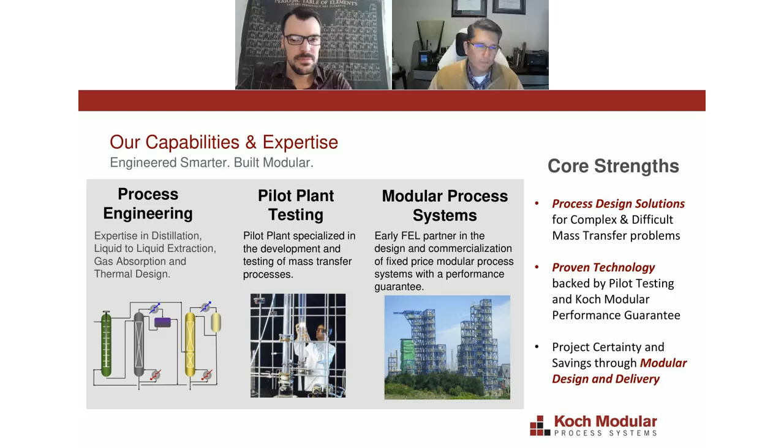I'll go briefly into our capabilities and expertise because Chris will be talking a lot about this during his presentation. Process engineering - our company is predominantly managed and run by process engineers who have expertise in distillation, liquid extraction, gas absorption, and thermal design. We also support that with pilot testing, which is very important when you're trying to commercialize systems, so we have a pilot plant located here in Houston. And then all our projects are delivered modularly, so we don't stick build anything - everything goes out as a truckable module. That sums up our core strength: process design, pilot testing, which is backed by a process guarantee, and then you get project certainty and cost savings through modular delivery.

That's enough about us. Just to introduce Chris - Chris has been with us for a few years now. Chris graduated from the University of Michigan, holds a chemical engineering degree. For about 15 years he's been working for various companies, including Dow Chemical, Origin, and BP. He brings a lot of experience in taking projects from concept to commercialization, so he's a very good person to be talking to us today about that specific topic. So with that, I'll hand it over to Chris.

Thank you, Mauricio. So today's talk on process development and scale-up challenges will roughly break into two parts. An early part on solvent selection and modifying a chemical reaction or separation to ease the process scale-up design, and then the latter half will talk about equipment selection and metallurgy.

So just so that we're all on the same footing with one another, what do we mean by process development? You may be familiar with the technology readiness level, or the TRL scale - this is used by NASA - or perhaps the Commercial Readiness Index, CRI. In general, I would say technology or process development is occurring once a chemical process has reached TRL 4 and it is trying to go to 5, 6, 7, 8. This means that a chemist or a team of chemists has successfully demonstrated the reaction at bench scale using beakers, 100 milliliter round bottom flasks, that sort of scale, and now it's time to move it into 100 liter or 1,000 liter reactors with the goal of eventually scaling to commercial scale.

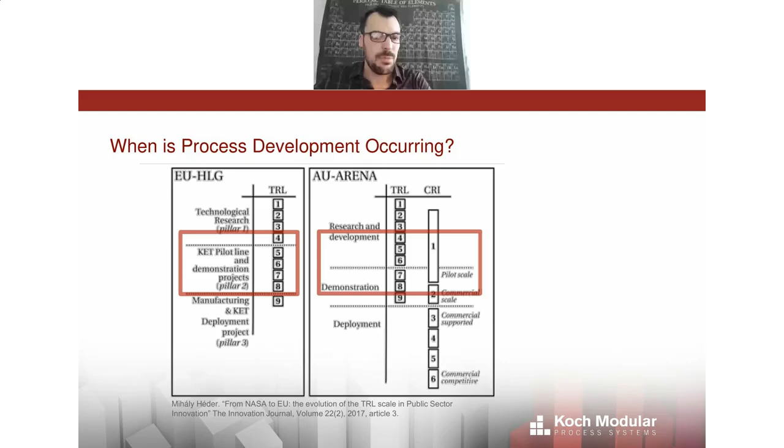When things are smaller or earlier than TRL 4, this is still the technology catalyst development ideation stage - different concepts are still being tried. And when you're later than TRL 8, you already have a manufacturing plant, and at that point you're replicating, doing minor improvements in efficiency or yields to become more competitive. So doing process development from TRL 4 to 8 is an exciting time because you have a lot of leverage - a lot of small decisions can have large impacts on how much the process will cost either to build or to run. We're going to go through a few examples of that.

Process development qualitatively could be thought of as conceptualizing a process, putting together the very first version of a flow diagram, doing the very first version of a simulation to show where the heat and energy and the difficulty of the separations emerges, usually in that first process simulation.

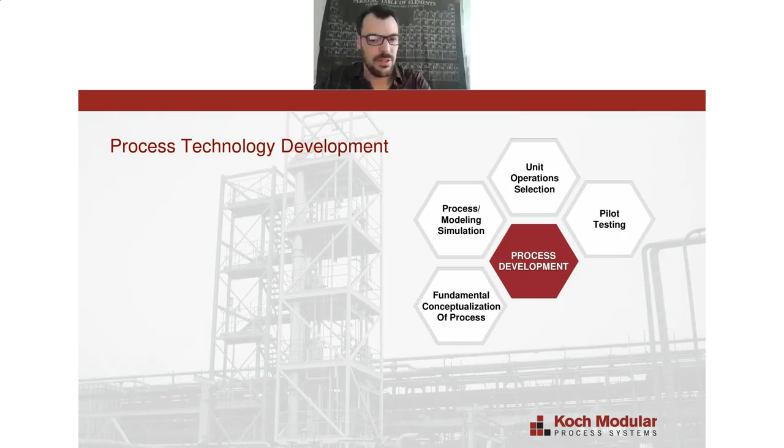Process development also includes the very first time you're going to select your particular unit operations. We'll go through a couple of examples later in the talk of how do you even choose the right filter or the right heat exchanger for a particular process you need. And often piloting is going on for the first time during process development, which has all the same challenges of a commercial plant design. You have to select all the equipment and get it to work and put it together.

So let's take an example. This is an expired patent I pulled off the internet. It's an oxidation reaction of cyclohexane to adipic acid.

Suppose you were the chemical engineer who was presented with this chemical reaction and you were interfacing with the team of chemists who had just finished developing this to the 100 milliliter wet bench scale. What might be one of the first things you do or ask for? There's likely to be a separations downstream to recover and purify the adipic acid, and knowing what you're separating from is important. So it would be nice if the chemist team provided you with a list of not only the desired products, but the concentrations of the impurities that are in the reactor effluent stream.

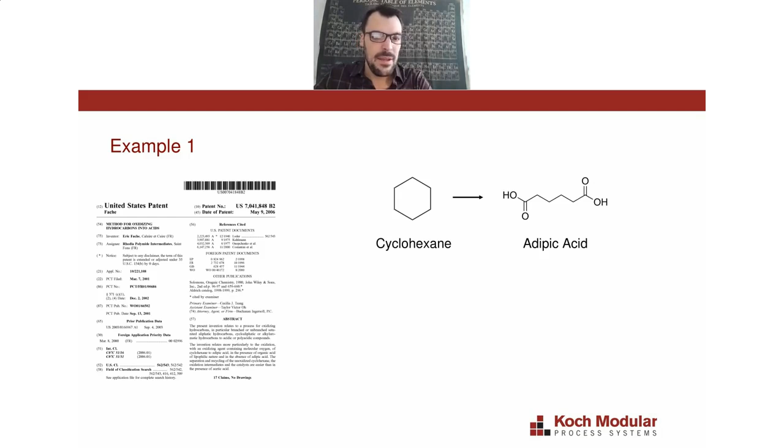That table is nice, but I recommend asking to see the chromatogram. Oftentimes it will be an LC liquid chromatography or GC gas chromatography chromatogram that analyzes the reactor effluent, and it will show the peak of interest. You don't have to know a whole lot about chromatography, but you can get a great deal of understanding of what's in there by pointing out certain peaks.

What is this? What is this? Things that elute late, out near 14 and 18 minutes - the x-axis here is minutes - those are higher boiling or heavier compounds. Things that elute early are lighter boiling compounds. And you want to just reconcile what the chemist is telling you with what you see in the gas chromatogram or liquid chromatogram.

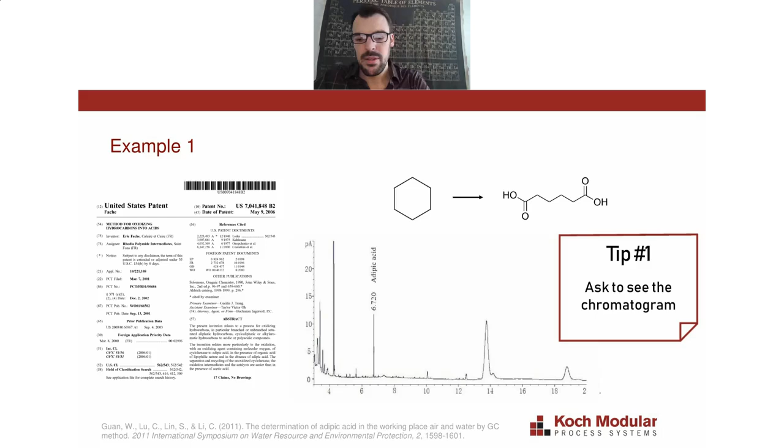The next thing I would recommend is always ask the question, what about heavies and inorganics? If a compound is too large, too high molecular weight, or too high a boiling point, it won't be resolved on the gas chromatogram - it'll just get stuck in the trap on the column. And it's unfortunately been my experience that those compounds aren't necessarily appreciated until much later in the process, perhaps when piloting has occurred and someone's wondering why there's a thick sludgy material at the end of the distillation.

This might have been discoverable earlier on if someone had asked, does this chromatogram resolve all the heavies that you're making? And inorganics, similarly, like salts, do not resolve on a gas chromatogram. So you want to ask about those as well, because they will be part of your separations challenge, even if they don't show up on the analytical analysis.

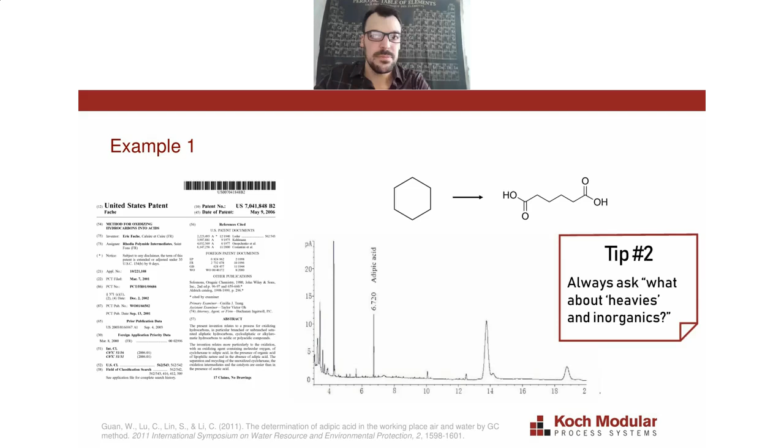The next thing I would do would be to scrutinize solvent choices. Since this is an oxidation, my expectation is it is analogous to para-xylene oxidation to make polyester. That reaction, terephthalic acid being a monomer for polyester, is well known - there are hundreds of operating facilities today that conduct this reaction, and it is done in acetic acid solvent. So it would be my expectation that this patent, which is doing a similar oxidation, probably uses acetic acid.

And indeed, when I read the abstract in the final sentence, you can see this was done in the presence of acetic acid. Now, alone, that might not pose a problem, but in the third to last sentence that I've highlighted, you can see the patent suggests they will be separating and recycling unoxidized cyclohexane. So if we want to recycle cyclohexane in the presence of acetic acid, is that going to be problematic?

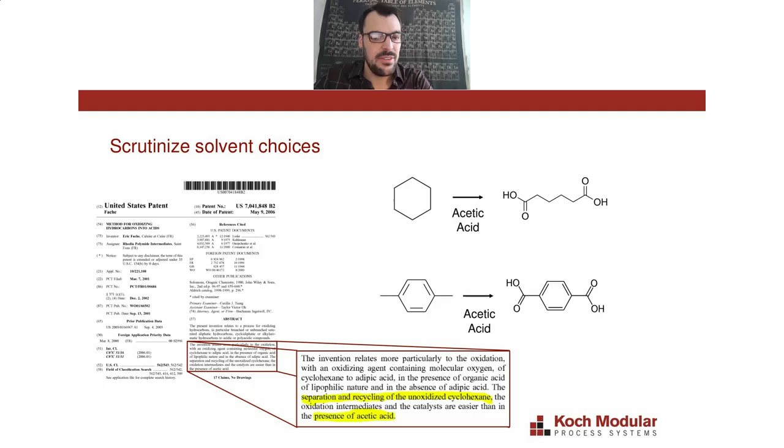So process engineering might ask the question, is there a substitute solvent for acetic acid that would work just as well from a chemistry standpoint, but doesn't pose this difficulty during the recycle? We could still design a process to separate this azeotrope.

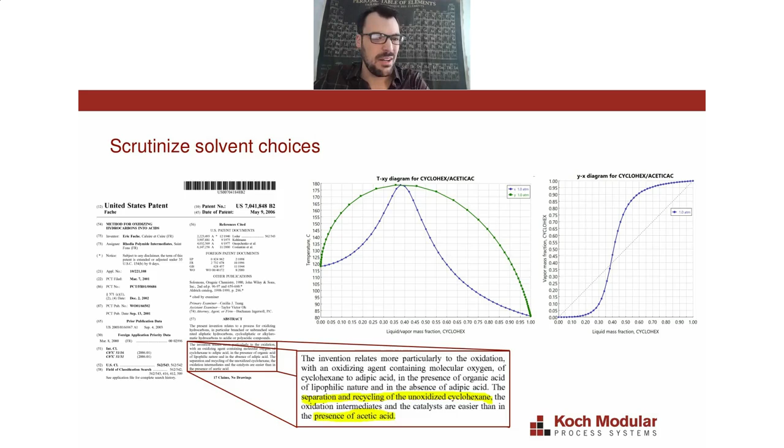It might involve bringing a third compound in and doing some sort of extractive distillation or using an entrainer or something like that. But what if we could make our life simple and just avoid that altogether? A reasonable suggestion might be to increase the carbon count of the acid species by one.

Instead of using acetic acid, let's look at propionic acid. The lower left panel is the TXY diagram for cyclohexane-propionic acid, and we can see it lacks the high maximum boiling azeotrope now. We have a not quite, but nearly ideal open envelope here.

On the right, the XY diagram shows that these are now separable. The bottom's product will be pure propionic acid, and the distillate has a little bit of a pinch up here. You can imagine stair-stepping the McCabe-Thiele diagram, and as you march towards the upper right-hand corner, the VLE does pinch.

So maybe a 95% cyclohexane, 5% propionic acid distillate can be produced from this particular set of VLE data, and that may be acceptable. But you've achieved nearly a complete separation now between your unreacted raw material and your solvent just by making a very subtle solvent switch.

And if you're still at TRL4, meaning we haven't yet graduated from the lab, we haven't yet done very expensive process engineering design, the pilot hasn't been built, this is a simple thing to go back and check. Once you're further down the chain and the pilot's been built and the engineering is done and the site has been chosen and the capital project is authorized, these kind of switches become virtually impossible and at least very expensive and causing of delays. So the earlier they can be contemplated, the better.

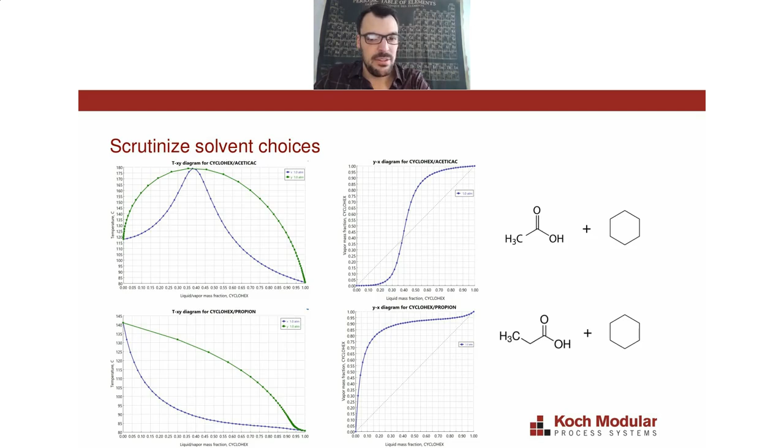All right, let's zoom in on this pinch a little bit here. Supposing they like the idea, but 95/5 recycle is just not going to work. That's okay, chemical engineers have a big bag of tricks. So what can we do to relieve the pinch at the cyclohexane-rich end of the spectrum?

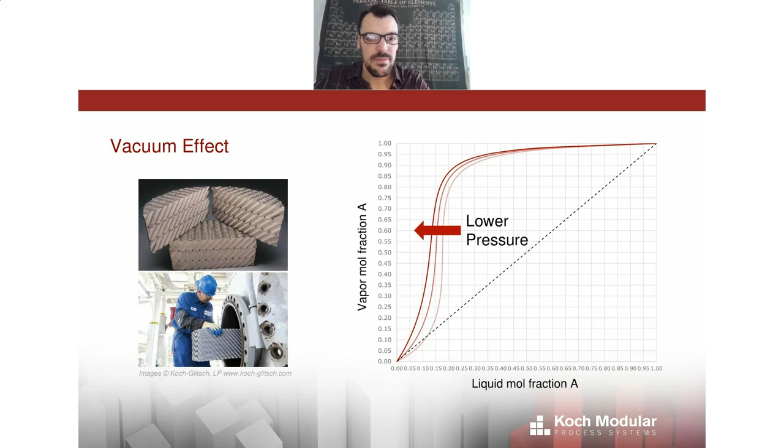So this could be a solution to relieving the pinch. It's a general rule of thumb that reducing the pressure of a separation increases the relative volatility between the two species. You often end up needing fewer theoretical stages and/or less reflux.

This can be most easily demonstrated if you're looking at a Cox chart. The y-axis here is incremented per the log of vapor pressure, so we have log P on the y-axis, and the x-axis is spaced out as 1 over T in absolute temperature terms, although it's displayed in degrees Fahrenheit.

When you have log P versus 1 over T, this is effectively turning the curved line you would see on an Antoine equation plot into a straight line. It linearizes VLE data, and you can see you get nearly straight lines for a given compound. Choosing a point at the high pressure, high temperature end has a smaller gap between any two given compounds than the low pressure, low temperature end.

So provided the VLE lines are not parallel, they do in fact diverge at the low pressure end, you can usually enhance the separation by reducing pressure. There's a bunch of known compounds on this plot, and that makes it easy to design for them, but occasionally a process engineer will be faced with the task of designing for compounds that are unknown.

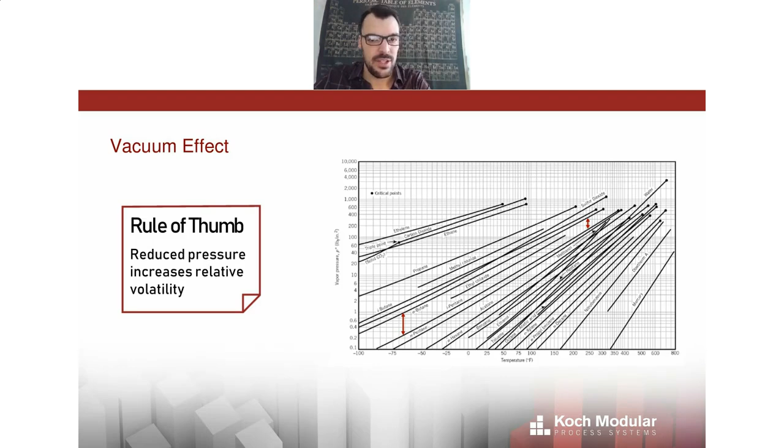And it may be necessary to go into the laboratory and generate your own binary pairs so that NRTL, the non-random two-liquid model, can predict the VLE behavior. This is not an easy task. You must carefully set up and operate an apparatus so that you don't have any theoretical stages.

You want to put the vapor and liquid in perfect equilibrium. Unfortunately, it's a common mistake or common unknown or oversight to have half of a theoretical stage in your VLE apparatus, and that will give you the wrong results. So the founders of Koch Modular published a paper almost 30 years ago. It was 1995.

It's still available in Chemical Engineering Online, which teaches how to very accurately and successfully measure binary pairs through VLE still apparatus operation, and gives the example shown here.

Not everyone has the apparatus or the desire to measure their own binary pairs. So when someone comes to Koch Modular, we offer our services in our pilot lab to measure these binary pairs on the client's behalf.

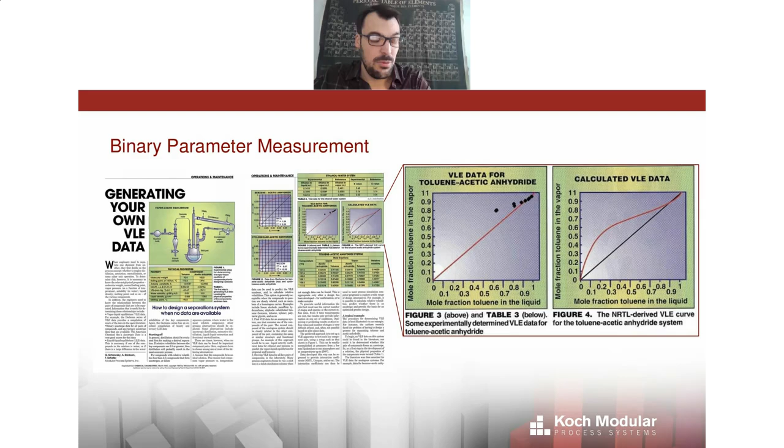We've done them many, many dozens of times successfully. The neat thing about accurate measurement of binary interaction pairs is they essentially enable a scale-up factor of infinity. If you know the behavior of vapor and liquid at this small scale, you can design any size distillation tower you want, without piloting it. That's rather unique to distillation.

The process engineer may suggest substituting a solvent for other reasons besides azeotrope. For example, chemical compounds have widely varying odor threshold ranges. Threshold limit values are the maximum, the TLV, shown in the second column here.

This tells you the maximum ppm to which a worker can be exposed. We also have the IDLH, the immediately dangerous to life and health value. And in table 3 on the right, we have the maximum allowable effluent concentrations to waterways before they become toxic to aquatic life.

So if your process has a wastewater discharge stream, it may be useful early in process design to find out the discharge limits for that compound, and whether you have a process operation that can readily achieve those limits. It may be wise to substitute solvents for something with a 10 or 100 times higher discharge limit, particularly if the separation for removing that compound from the wastewater stream is difficult.

All these tables and more came from Ian Smallwood's Solvent Recovery Handbook. I've referred to this book many times when trying to substitute a solvent or get away from an azeotrope. It's a handy reference.

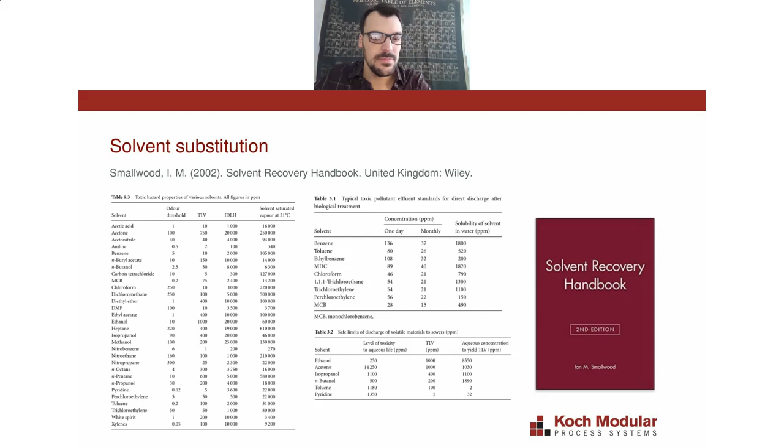Another task we might want to do is get rid of a solvent entirely. It's quite common for a process at TRL4, at the bench scale chemistry, that the chemist has selected a solvent to produce a product, and the product and solvent will be similar compounds but not identical.

For example, they're trying to produce propionic acid, and they did the reaction in acetic acid. Those two can be resolved by analytical techniques, and it's very easy to tell how much propionic acid was made because it doesn't overlap in peak with acetic acid.

But we don't necessarily need that capability at production scale. If you can run the reaction in the product itself, why not do so and save yourself an extra separation?

This is not a good idea if your reaction is equilibrium limited. Reversible reactions, if you flood the reactor with product, will tend to drive it in the wrong direction, so reactants form instead of product. We don't want to suggest this for a reversible reaction, but for irreversible reactions, this can be a very clever trick for eliminating a separation.

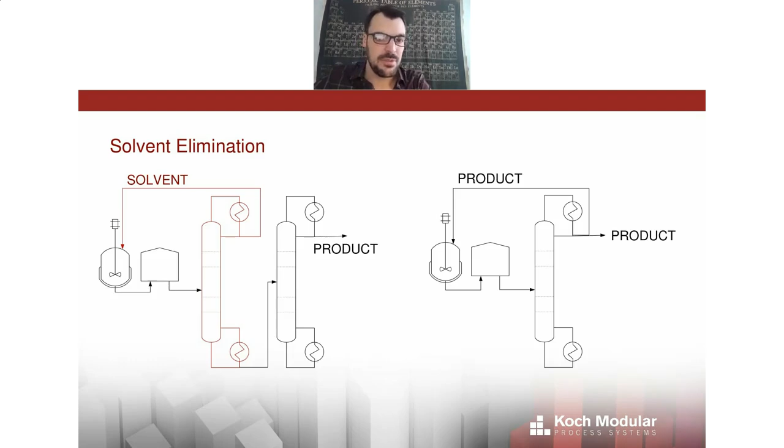Sometimes a two-step reaction will involve a solvent swap. For example, if reaction 1 is A plus B goes to C, conducted in water, and then C is further reacted to form compound E in a different solvent for some reason, say diacetone alcohol. Diacetone alcohol has a higher boiling point than water, 166 Celsius compared to 100 Celsius.

This makes a solvent swap trivial and straightforward. You would take your mixture of C plus water, mix it with diacetone alcohol, and feed it to the distillation tower. Take the lightest boiling species, water in this case, off the top. Assuming C is a heavy boiler, it's carried out at convenient concentrations for the next reaction in diacetone alcohol as a bottoms product.

But what if the reverse were the case? What if reaction 1 had been developed in diacetone alcohol and reaction 2 had been developed in water? It's not possible in this case to feed the water into the mixed C plus DAA stream, because water will just come off as the distillate, leaving C in the same solvent it started in.

Process engineers will recognize this challenge. It's not always appreciated as a challenge if you're in the chemistry lab doing bench scale chemistry, because this is commonly encountered where a chemist finishes their reaction in diacetone alcohol and puts it on the rotovap, removing all the solvent.

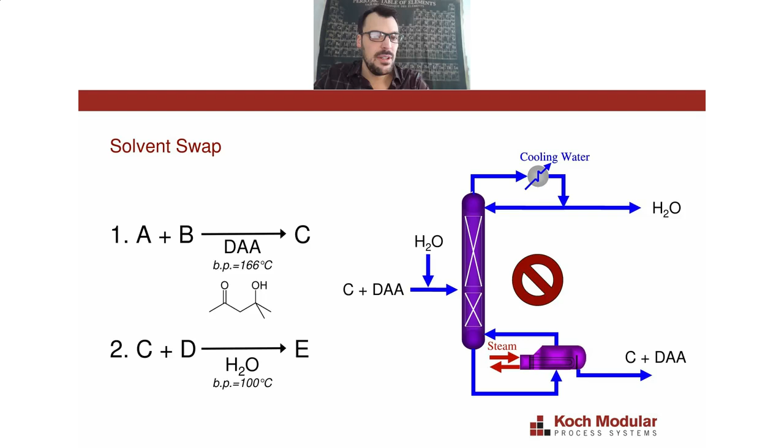We'd like to avoid this if we can. So how would we get around it here?

We might suggest a different alcohol that's lower boiling than water. For example, methanol, which does not form an azeotrope with water, restoring the trivial separation where we just mix the water with the C and methanol stream, distill off the light boiling methanol, and carry C onto the next reaction. Chemists may object, saying methanol is too polar, or for some other reason.

There are other alcohols we might consider. We might go to the next less polar alcohol, ethanol, but we should be aware we've just encountered an azeotrope with water. The water-ethanol azeotrope is about 95.5. I don't want to represent that we'll distill to 95.5, because it takes an awful lot of stages to get to the azeotrope, but getting to 93.7 is pretty straightforward.

So if I were asking the chemist to retest reaction number 1, I would not want them testing dry 200 proof ethanol. I would request that they do it in 93.7 wet ethanol, because this is what I can readily distill from that mixed system.

We can go one alcohol higher, IPA. This one forms an 85.15 azeotrope with water. The water is making things more polar, so it's probably getting less attractive, but nevertheless, if one of these three works, it's a quick win that's going to greatly simplify your process design. So that makes them worth trying early on.

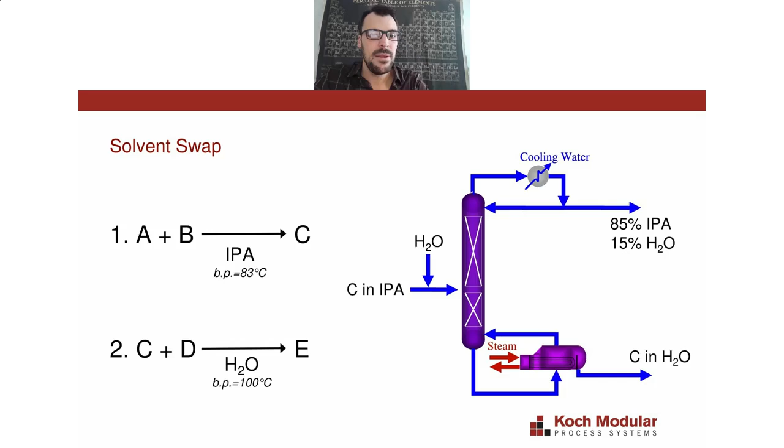So at this stage, I'd like to transition to equipment selection and talk a little bit about how one faces the challenge. We've left the process technology stage, the solvents are chosen, the chemistry is locked down, and you've got these blocks on the block flow diagram that say filter underneath them. How do you choose what piece of equipment is going to suffice in that block? What are you going to build from a pilot scale perspective?

Filtration means solids, and solids are usually the bane of chemical engineers' existence. Projects tend to have higher failure rates when solids are involved, but at some point you're probably going to encounter them. And there are a myriad of filters to choose from.

The challenge here is probably that any salesperson you would care to call up tells you their filter will work just fine for your application. And chances are they're right, some scale probably works. But these filters represent 2 to 3 orders of magnitude of cost difference.

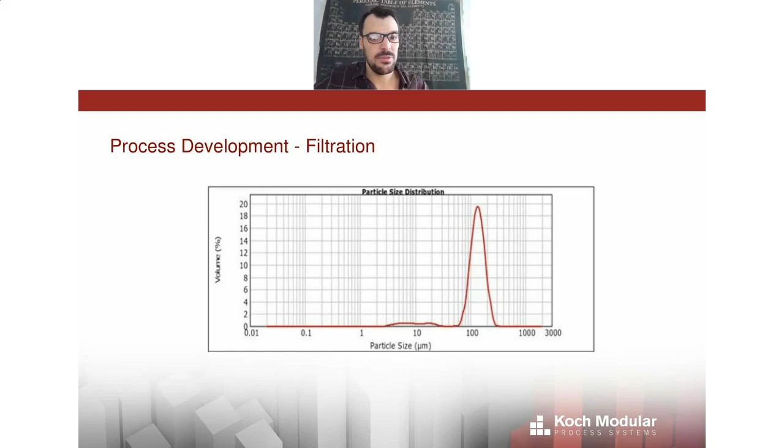If you're in a large organization that has filter experts who design these all day long, then your life just got really easy, but not everyone is afforded such a luxury. So you may have to proceed to forming an opinion on what type of filter to use on your own.

In that case, the laboratory can usually provide a Buchner funnel style constant pressure filtration apparatus. There's a vacuum applied to an Erlenmeyer flask, which is beneath a sandwich filter element or filter paper. The slurry is fed to the top unit there where the blue lid is. And someone with a stopwatch and a graduated cylinder can take notes on how many milliliters of filtrate have passed through per unit time.

With that information, this chart comes from a paper in the AICHE journal from 1956, so it's some 70 years old, written by Grace. With the information I've just described from the system on the right, you can plot the data two different ways. The two upward rising curves here are the same data, just plotted against different axes. You take the incremental time per unit volume filtrate, time per volume, and plot it versus total cumulative filtration time, or plot it versus total cumulative filtration volume: T over V versus T, or T over V versus V.

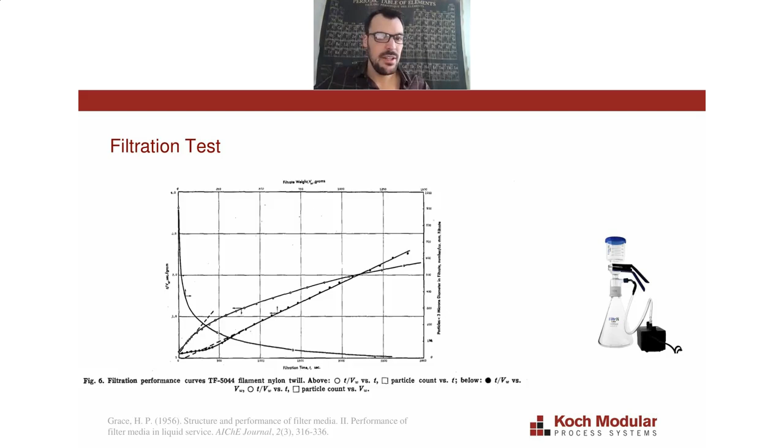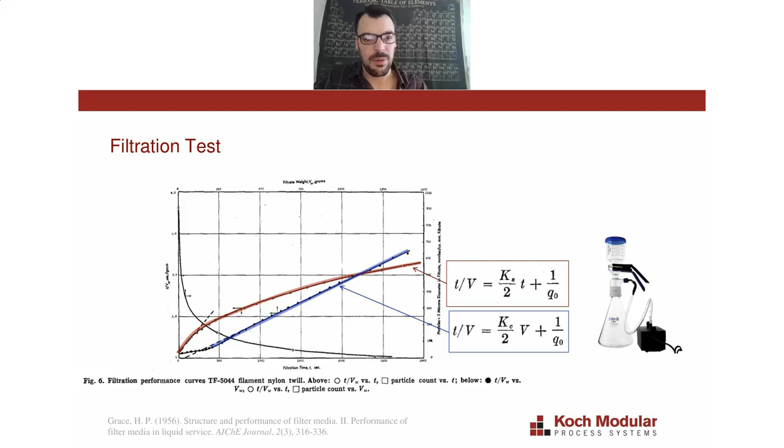So this is a simple example of using underlying physics, the properties of the slurry, to help guide the choice of a filter in a way that's perhaps contrary to our intuition. What I've tended to observe is engineers like to go back and use what was familiar. If an engineer used a candle filter on a previous job, they're 100 times more likely to recommend a candle filter on this job because they've seen it work before and they're comfortable with it. But that's not the best way to do unit operation selection.

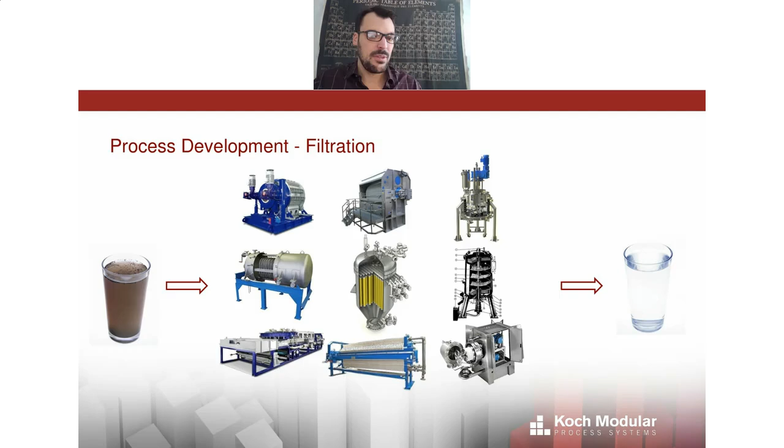The best way is to measure something important, something physics-based about your system, and then match it to a piece of equipment based on those properties. To do that, let me give another example, and then I'll talk in general about how to do that. You'd face the same challenge if you were designing a reboiler for a distillation tower.

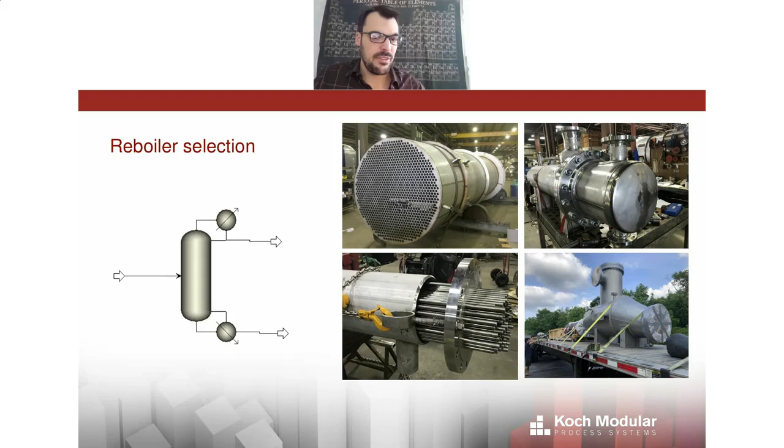Reboilers and condensers have multiple configurations - horizontal and vertical - but there are also different types of reboilers: thermosiphon, forced circulation, falling film, or kettle style. In a thermosiphon, the liquid circulates automatically because the boiling fluid is less dense, creating a pressure gradient, so everything starts to move on its own. Forced circulation involves a pump, as does falling film. A kettle does not involve a pump - it uses gravity to separate the vapor from the liquid, spilling over a bottoms product.

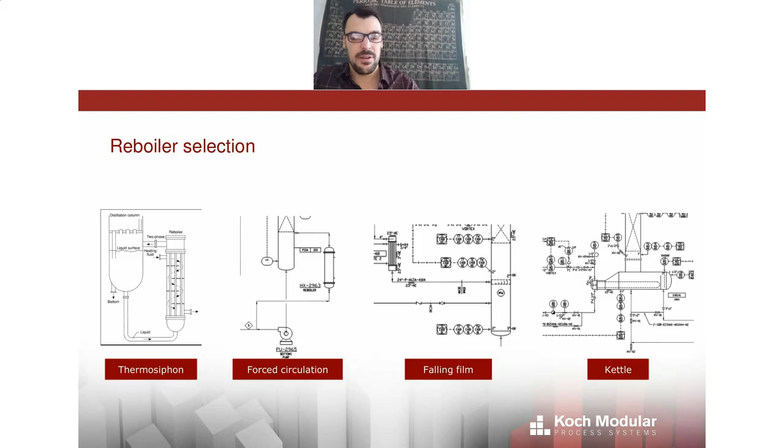So how do you form an opinion on which one is the right one? There are too many factors to consider here, but let me give one story that illustrates why this is an important question to consider and not just fall back on what was familiar and used last time.

There's an excellent illustration from a Henry Kister article in 2017 where a parallel thermosiphon reboiler train was found to stall out every time the plant turned down to 50% capacity. They would try to turn it back up, and one of the two trains would be dead - not boiling anything - so all the load fell on the opposite side, which by itself was insufficient to achieve nameplate capacity on the distillation. It forced them to shut down, drain the shells on the stalled side, refill them, and turn it back on.

What's going on here? There was a very wide boiling point difference between the compound that was boiling, ethane, and the compound that wasn't boiling, the heavier hydrocarbons. When you have a wide boiling point difference, it makes you ask: can the steam utility or hot oil utility providing heat to the tower boil both components, or only one of them? In this case, it could only boil the lighter component, and at turndown conditions, there was insufficient circulation through the loop to keep enough of the light component re-entering the reboilers, so it would fill up with the heavier component and boiling would stop.

And if boiling stops, circulation stops, because this is a thermosiphon. So in general, it's not very wise to match thermosiphon reboilers to a service where you have a wide boiling point difference and you can't boil one of your two components. You want to be able to boil 100% of what's in the system if you're using a thermosiphon.

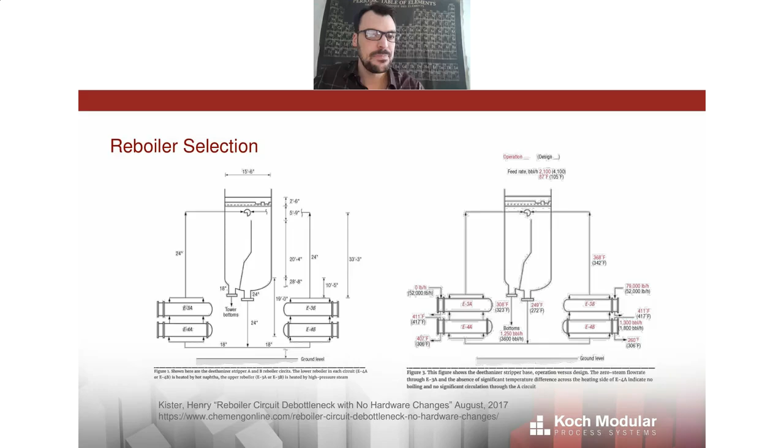Not all of these types of equipment are necessarily in all of our heads. So how do you gain an understanding of what's out there? What are your choices? I recommend finding or building an equipment taxonomy.

A taxonomy starts from a high-level type, for example, column contactors or liquid-liquid extractors, and then breaks it down one level at a time into substages, static and agitated. Among static extraction columns, there are three types: spray, packed, and tray columns. Among agitated, there are also three types: pulsed, rotary, and reciprocating. These six types at the bottom of the taxonomy all have their specific advantages and disadvantages, and hence find their way into specific applications in refining, petrochemical, nuclear, and chemical industries.

If you're lucky, you can find a taxonomy with a couple of pages of write-up on how the advantage of one particular type means it's most commonly used in pulp and paper, or most commonly used in some sort of petrochemical application. This lets you look at those criteria and compare it to the process you're doing scale-up and design for, and say, based on the advantages here, I'm going to match it to this particular application.

As opposed to saying, what did I use last time? I used a rotary last time, I want to use a rotary this time as well. We want to, as much as we can as engineers, break away from always repeatedly using what's familiar, because we'll probably eventually encounter a case where it's not helpful to do that, and instead always rely on matching the best possible unit operation to our particular challenge.

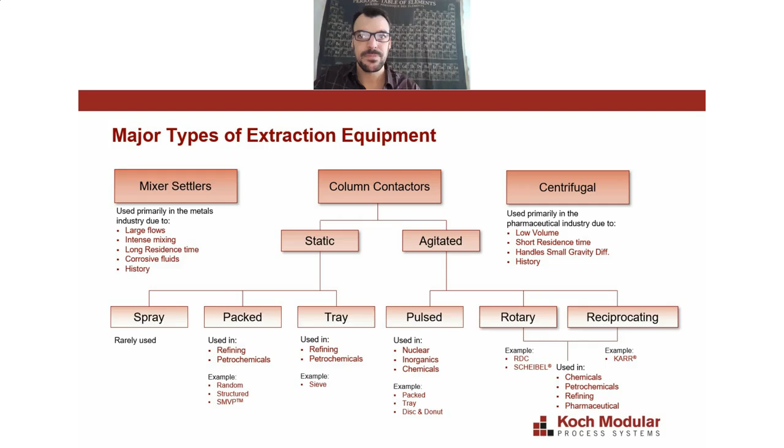Okay, I'm going to switch now into talking about corrosion data, because we can't choose a filter and we can't choose a heat exchanger or an extraction column if we don't know what materials of construction are suited to your particular application. And unfortunately, corrosion studies tend to be a bit of an afterthought. A lot of engineering gets done, a lot of process design gets done, and now someone wants a cost, budgetary estimate or a firm price on what this system will cost. It's almost impossible to render such a cost unless you know what materials you're building out of.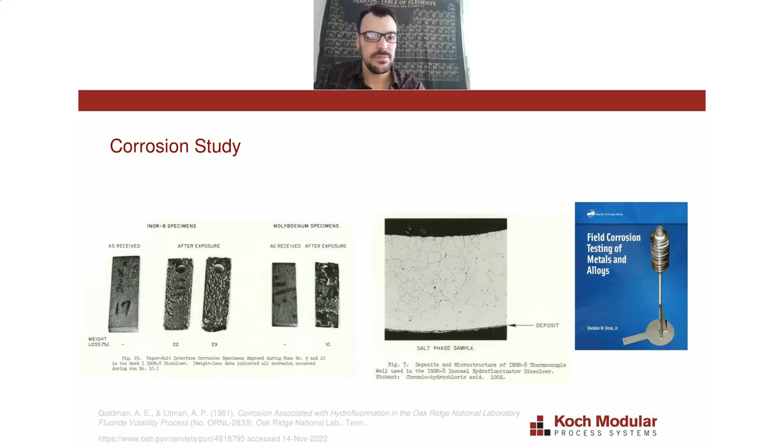Other engineers doing process design and scale up should be at least familiar with the types of metals out there. Carbon steel is probably the most common metal used in petrochemical process systems, but if it's corroded by the contents of the reactor, we can go to successively higher and more expensive alloys.

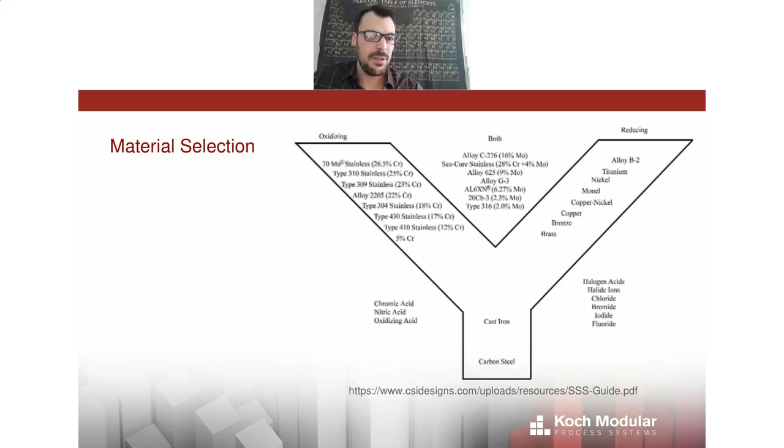So those two metals get chosen a lot. There are very deep and plentiful supply chains for alloy C276 and 316 stainless steel. It's quite common that corrosion rates won't be fully understood or studied across many alloys - it'll sort of just resort to 316 and C276. So I recommend always testing 316 and 276 in addition to whatever else you're going to test.

Test as many metals as you like, but don't leave those two out, because there will come a day where you're trying to find a particular fitting or instrument - a 90-degree elbow with raised face flanges and a 300-pound pressure rating - and it's just not available in some of the lesser known alloys, but you can almost guarantee you'll find it in 316 and C276. So test those always in addition to whatever else you're testing, so you have future options available when it comes time to build the system.

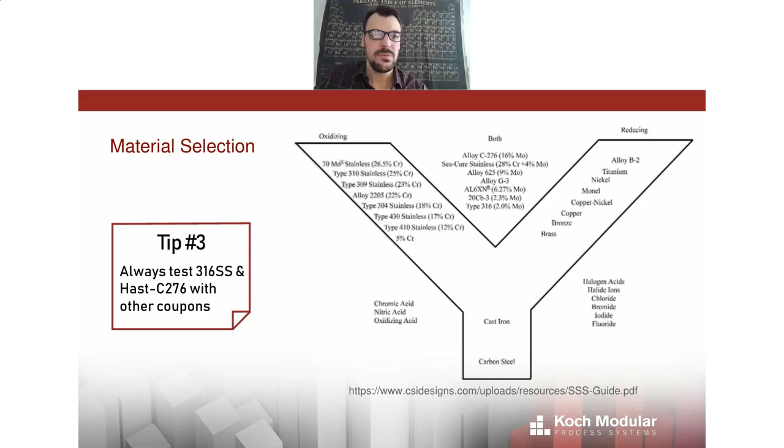Process engineers doing scale up should also be aware of cracking. It's not enough to just test for wall loss - if the corrodant forms cracks in your metal, that won't necessarily show up in a weight loss test. It tends to be the case that either welds or the heat affected zone around the weld are the most susceptible to cracking. So you can pick this up in a more rapid test by using a welded and stressed coupon.

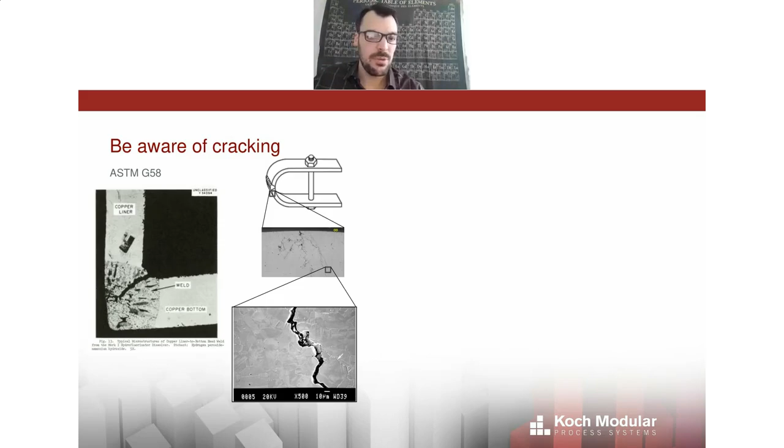Probably everyone's heard of chloride cracking for stainless steel. All austenitic steels are susceptible to chloride cracking, but there are about 10 or 12 known cracking mechanisms. Amines and ammonia are known to crack brass. Caustic and ethanol at high enough temperatures can crack carbon steel. Methanol can crack titanium. There's a marvelous and wide range of cracking mechanisms, and you don't want to use a metal that's very robust in terms of mils per year.

Wall loss is negligible, but it has a cracking susceptibility - this is a difficult thing to learn, and you want to consider the OD and the ID as well. When you're building out of stainless steels, it has been the case that people spreading de-icers, calcium chloride or sodium chloride de-icers, the melted snow drips through and gets under the insulation and cracks things from the outside. So consider the outside diameter and the inside diameter when choosing metallurgies here.

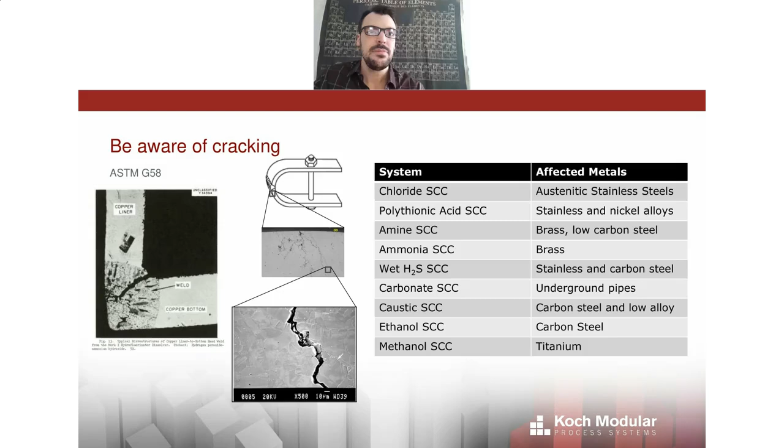We've gone through an awful lot. All of these fit into process development. Of course, if you're past TRL4, the engineering's been done, and it's time to build.

We, Koch Modular, are an EPC. We do design and build, and do all the systems integration, instrumentation, and DCS programming to get a chemical process system up and running. But I enjoy getting involved with clients back at the TRL4, TRL5 level where the conceptualization of the process is going on.

So the earlier I can engage with a client, the more these questions can be asked - these solvent substitution questions, metallurgy questions - raising all these issues which have high leverage, high chances of reducing the capital cost or operating cost, which in turn increases the success likelihood of any given process getting built.

Things being too expensive is the number one reason things don't get built these days. So good process development, technology development early on gives you a higher success rate on your projects. We all like to work on things that are going to get built.

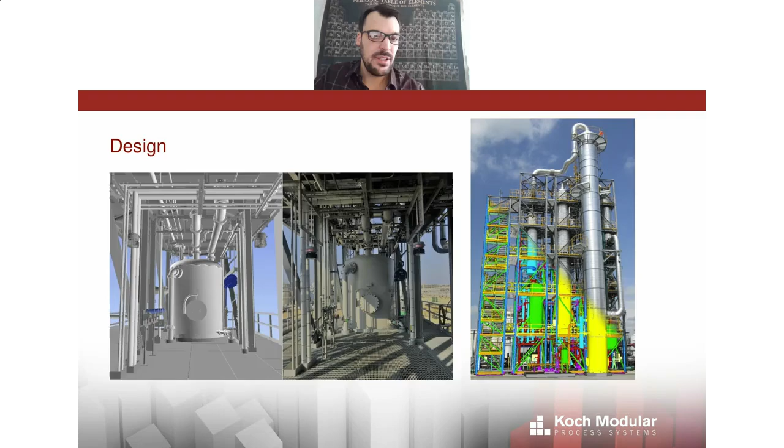Koch Modular does 3D design, complete 3D layout, so you can walk through modules in 3D before they're built. These modules are as small as indoor pilot scale demonstration units on the left, medium scale distillation extraction units like the 3-module plus stair tower one in the middle, or 20 plus module integrated systems producing multiple products. We've done all of the above.

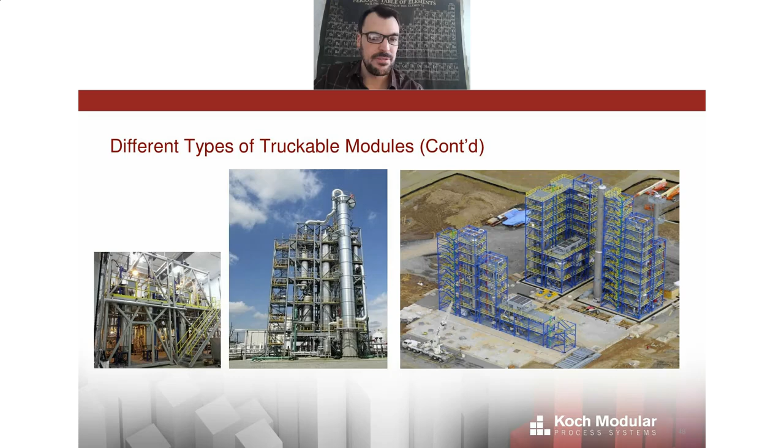All modules made by Koch Modular are road truckable. We can build them in multiple different shops across the United States, Europe, or Canada. The modules, once completed, are driven via truck on site. They're the right envelope size to fit under US bridges and can also be packaged and put on boats and shipped overseas. And then cranes will erect them and set them on a foundation.

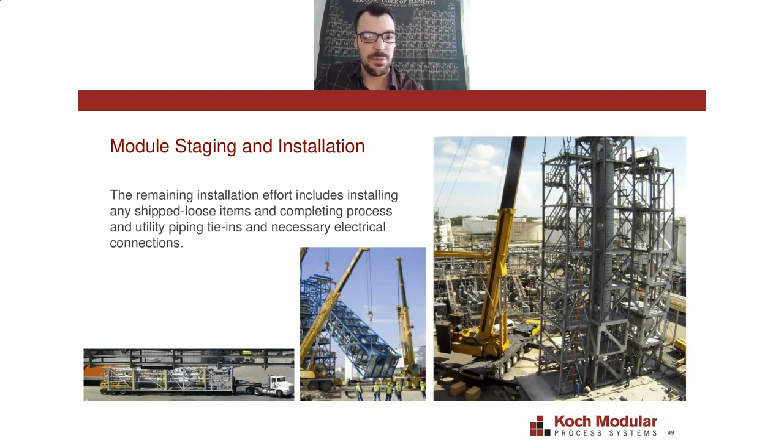A pair of cranes can put up 3 to 5 modules in a day. Koch Modular supplies all the interconnecting spool pieces between the different modules, as well as the deck, flooring, and railing between the modules. So 90% of the field construction is eliminated using the modular approach.

And that concludes my process development talk. We've left the chat open here for a few questions.

Great, thank you, Chris. Thanks for sharing your experience and your expertise with the group. Do have a couple questions for you. The first one would be, do you know of any examples where piloting really didn't help the situation?

I know of one story where a pilot line was built and operated, and more or less the products coming out of the pilot line were successful, and there was never a deconstruction or opening of the pilot equipment afterwards. So when the eventual commercial system was built, there were these filter baskets that endlessly filled up with corrosion products - they were iron salts. The plant was corroding and plugging up the filter baskets. And the plant manager was standing there saying, didn't anyone find this at pilot scale?

So they went back to the pilot line and took the heads off all the heat exchangers in the pilot, and sure enough, every heat exchanger was full of corrosion products that had just never been observed because no one looked at them. So it's an example of building a pilot and then not learning perhaps what should have been learned from a pilot operation, which is unfortunate.

So take your pilot line apart and look for problems. Don't assume they're going to pop out. Great, thank you. Another question is, are you aware of any pitfalls that we should watch out for when we're trying to take something through concept into commercialization - things like, oh, if we had done this, things would have turned out so much better?